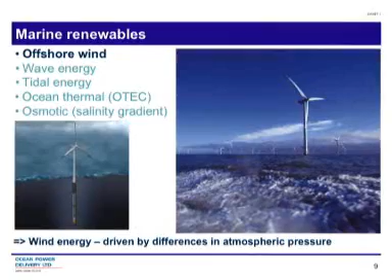I mentioned wind energy, and offshore wind energy is considered to be one of these marine renewables. What you see on the right here is a conventional offshore wind farm. Why do they go offshore? Firstly, there's a lack of space, particularly in Europe, to do the big projects that are required. There are projects, 1 gigawatt, 1,000 megawatt projects proposed east of London in the North Sea, and there aren't that many places in the UK where you can do that size of project on land. But also the wind speeds are much greater offshore.

And again, it's driving innovation. On the left here, what you see is an illustration of a floating wind turbine being developed by Norsk Hydro, which may or may not come through to fruition, but it's quite interesting to see how these things develop. I think the common thing here is that many of the issues we face, many of the legislative issues, are common to all of these technologies in terms of permitting and the route through environmental consenting.

Take wave energy. What is wave energy? It's not to be confused with tidal energy. The two are both wet and salty, but they're very different energy resources. Wave energy is created by the action of wind across the sea, and it's the time-average transfer of energy from the wind to the sea that creates the waves.

Typically, the sort of waves that contain all of the energy, the deep swell waves, have periods between wave crests of somewhere between 80 and 150 meters, and time periods between those wave crests of anywhere from 8 to 15 seconds. So it's those deep swell waves that contain the energy.

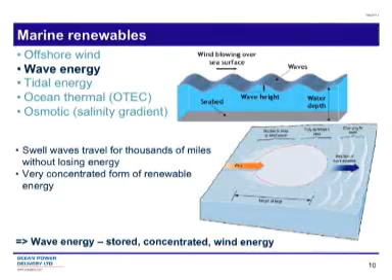In order to create those waves, you need the fetch of the ocean, which is what this right-hand picture shows. It's that sustained action that forms firstly little ripples, and then progressively larger swell waves. Those waves can travel for many thousands of miles across the ocean without losing energy, making it a very concentrated form of renewable energy.

So ultimately it comes from the sun. The sun drives the wind drives the waves. Tidal energy, on the other hand, comes from the moon—lunar energy, you could say. It's the gravitational pull of the moon in combination with the sun that gives rise to the tides, and it's the differences in sea height that drives the flow of water between locations. Tidal energy concepts are all about harnessing the flow of water between those different locations.

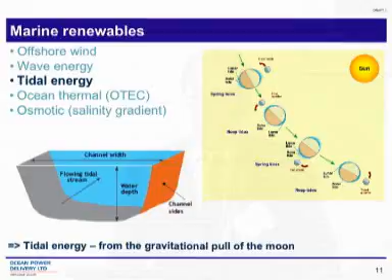Typically what you need for a good tidal location is a constricted area where you've got water pouring from one place to another. A couple of other types of energy here, which I'm not going to cover in this talk, but just to include for completeness.

One is ocean thermal, which the US had a program looking at and built a couple of demonstration projects, but I think was closed down in 1999. This is about harnessing the temperature difference between different depths of the ocean—cold water in deep water, and warmer water at the surface heated by the sun—and utilizing that temperature difference. What you see on the right is a sort of reverse refrigerator, where you're using that cold energy to effectively drive a turbine in a closed circuit with ammonia.

And then finally, another kind of oddball one is osmotic energy. This is really energy that arises from the mixing of fresh water and salt water together, and you can build up an osmotic pressure through a membrane, which apparently can drive quite a lot of energy.

I'd say these are ranked in order of activity. Offshore wind energy is where the commercial money is at the moment, and where there's a lot of development going on. Wave and tidal are both at the same sort of level of development, and ocean thermal and osmotic energy are probably a little bit further behind in terms of current activity.

I wanted to give you some examples of wave energy. Unfortunately, there's not really enough time to talk about these, but just to give you a kind of flavor of the different concepts out there.

On the left is a shoreline machine called an oscillating water column. Waves come into a collector, crash into it, and drive air up through a turbine, which is uniquely designed to work in two directions. As the air passes through the turbine blades as a result of the wave action, electricity is produced.

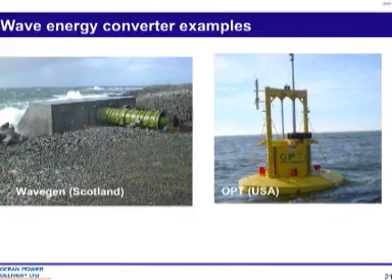The machine on the right is the one from New Jersey, from Ocean Power Technologies, which have a buoy-type system with an outer ring and an inner ring that goes up and down in relation to the waves.

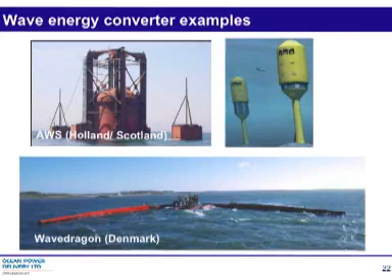Another type here at the bottom is called the Wave Dragon. This is a bit like a hydro project - waves come over a barrier and then drain down through turbines that sit on this kind of artificial beach that's moored out at sea.

Another one up top is called Oceanlinx Australia - it used to be called Energetech, but they changed the name. This again is another type of oscillating water column, but this time the machine is out at sea and moored there.

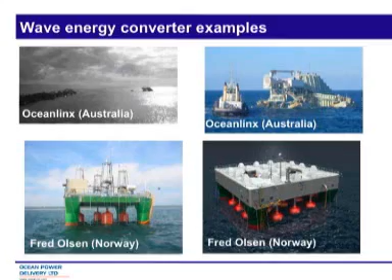Another one here at the bottom, Fred Olsen. Fred Olsen is quite big in Norway in shipping and the oil industry, and this is a system which potentially has application on offshore oil and gas rigs.

Then on to tidal energy, flow energy examples. This is a UK company here on the left, SMD. These turbines are moored, and when the tidal direction changes, the whole machine flips over and allows it to face into the direction of the flow, either way the flow goes.

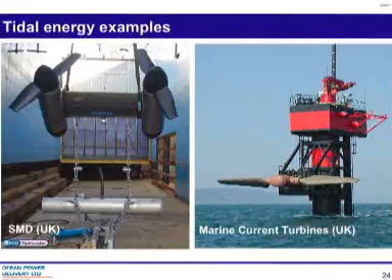Another one here on the right, this is Marine Current Turbines. This is installed in the southwest of England, and they're currently building another project in Northern Ireland. What you can see here is very much like a wind turbine, except it's under the water. And because of the density of tidal energy, you can have a much smaller machine for the same power output as a much larger wind turbine.

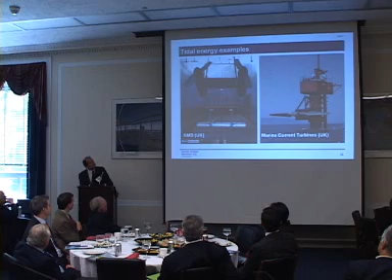What you're seeing here is the machine in its maintenance location. Normally, of course, the blades would be in the water, so they go up and down there on the machine.

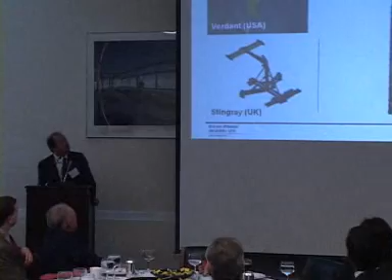Another couple of different types - Verdant. They've got a project in the Hudson River in New York to harness the flow through the river, and they've been doing very well with that.

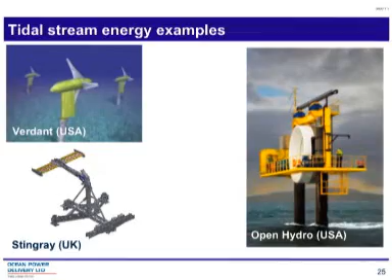Another machine at the bottom, Stingray - this is more of a hydrofoil that moves up and down with the flows. And then on the right, another US company with a project they've now installed in Scotland, called Open Hydro. You can't really see it there, but it has a kind of ring that moves around as the flow passes through it, rather than having a central axis - it has a hole in the middle and it's really just the outer part that moves.